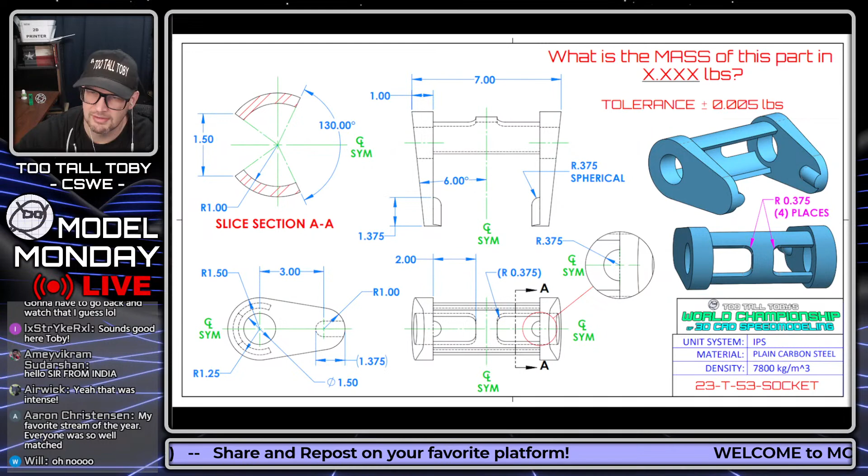We've got this one here, the counter shaft. This is number 56. If you want to see me model this, I'd be happy to do it. Number 53, the socket. If you'd like to see me model this, number 53, let me know.

Number 59, the duct. I'm definitely going to do this one as well. Our runners did not finish this one, so I'm going to model this one up for all of you today using Onshape. And number 41, the support base. Number 58, the housing. And Airwick says, I did that one, number 55. There's definitely an interesting bit in that one. Okay, cool. Yeah, we're going to definitely do that one in sheet metal.

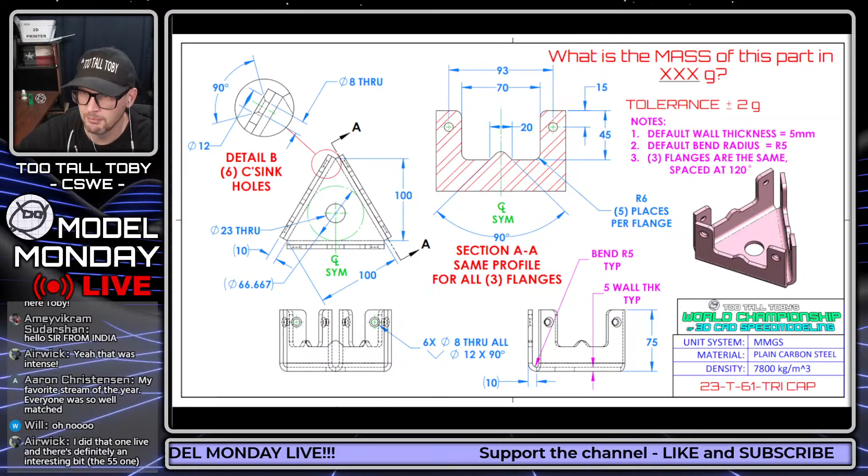Yep, in Onshape. Number 58, the housing. Very, very fun model. Definitely some tricky elements to this one. And finally, number 61, the tri-cap. So lots of models here for you to look at. You can roll the video back if you want to pick out one that you want me to model. Otherwise, I'll just model the duct and the sheet metal part, and then we'll see if we have time for any other ones. So I just wanted to show you them before we got started.

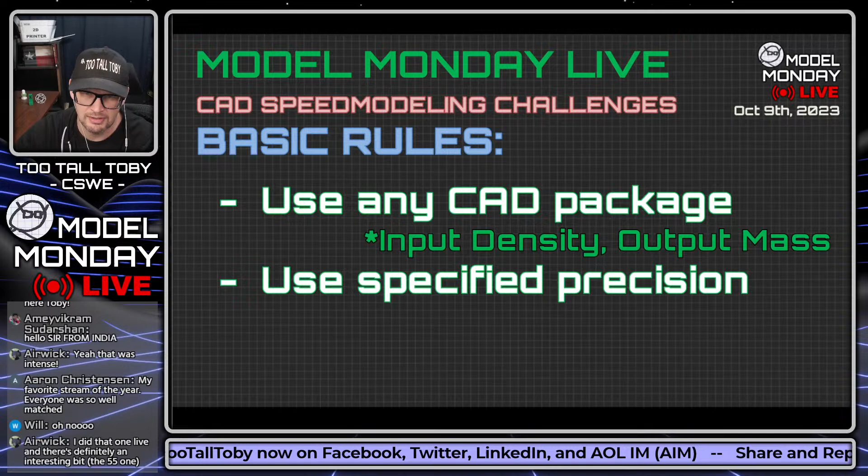All right, so here we go. Here's your first speed modeling challenge. I'm going to show you a 2D print, and I'm going to challenge you to turn that into a 3D model. And your goal is to calculate the mass of this model and to enter that mass in the YouTube chat. Now, the basic rules of this challenge are that you can use any CAD package as long as you can input a density and output a mass. Use the specified precision that is on the print, and the first correct answer in the chat will be declared the winner.

Here's the units that we use. We use either IPS, inch, pounds, and seconds, or MMGS, millimeters, grams, seconds, and we ask for the weight in either pounds, grams, or occasionally kilograms. The materials that we use are coming right from the SOLIDWORKS library, so if you're using a different CAD system, your library might be a little different. Just make sure that you've got the materials mapped with the density that is shown on screen at the moment.

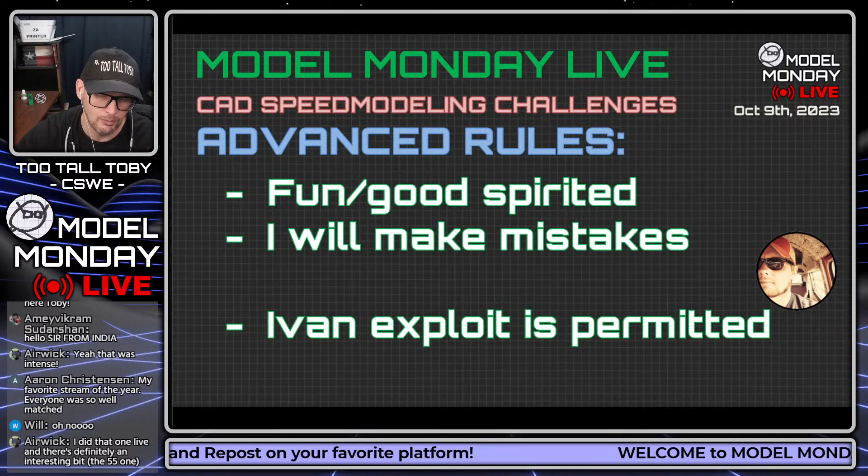And the advanced rules are that this is meant to be fun and good-spirited. I will make mistakes from time to time, and the Ivan exploit is permitted in this challenge. So if you can find a spot to use it, do it. But if you don't want to, don't do it. Just do it the right way. No offense, Ivan. All right, here we go.

This first CAD challenge on this beautiful Model Monday, October 9th. Let me just adjust my screen a little here. Make sure you guys can see the whole thing. Stand by. Okay. This first CAD challenge begins in 3, 2, 1, go. Okay, we're going a little old school here. We're going back to 2021, some of the old files before the purge.

All right. I hope that was enough time for everybody to grab a screen capture of that challenge, to move it over into your second monitor, and to begin creating that using your 3D CAD of choice. I'm going to talk a little bit about the tournament, and then we are going to get into some Onshape CAD modeling, because these days Onshape is my 3D CAD of choice.

So let's talk a little bit about the tournament here. Guys, we're in the Elite 8. I made a little promo video this morning letting everybody know. Here we are, the Elite 8, the final 8 people. Basically, we're at the bracket championship for each of these brackets. So here in the black bracket, we started way back on July 15th. And now here we are, October 21st.

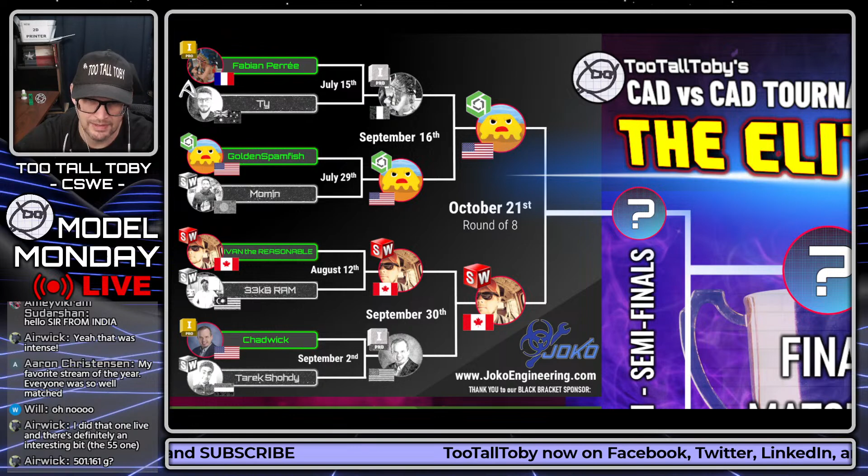We got the Golden Spamfish using Onshape. We got Ivan the Reasonable using SolidWorks. And whoever wins that match is going to essentially be the champion of their bracket. They're going to move through their bracket. They're going to be declared the champion of the black bracket. So very cool that this is where we are in the tournament. The Elite 8 kind of rounding out. We're down to just 8 people.

It's crazy. Juiced from the blue bracket, October 21st, is going to go up against Victor K. Victor K is a very speedy SolidWorks user. Juiced is a very speedy ANSYS SpaceClaim user. And we're going to find out. You know, a lot of people are saying, oh yeah, ANSYS SpaceClaim is fast, but only when the geometry isn't complicated. Well, in the round of 16, the geometry got more complicated. In the Elite 8, the geometry is going to get even more complicated. So we're going to find out if that's true or if Juiced is able to just cruise right through, no problem with that more complicated geometry.

She has been absolutely crushing it. She got through the round of 32. She got through the round of 16. She is now in the Elite 8. And congratulations to Jihan moving through that. And of course, also to Imants.

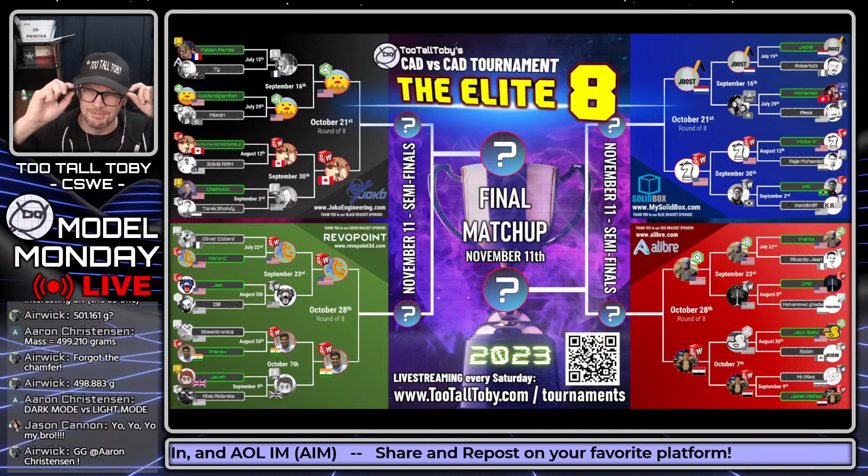Hey guys, we got Jason Cannon in the chat. What is up, my brother? Welcome, thanks for joining us today, great to see you in here. As some of you know from the tournaments, Jason is, I guess you'd call him, my CAD mentor. He's really helped me figure out my way in the world of CAD and 3D CAD. So, truly an old friend and somebody I'm very glad to see in the live stream today. What is up, Jason? Thanks for joining us, bro.

All right guys, so let's move on now. Oh, John is here as well. John, welcome, thanks for joining us. Got a nice sheet metal challenge for you there for that first challenge.

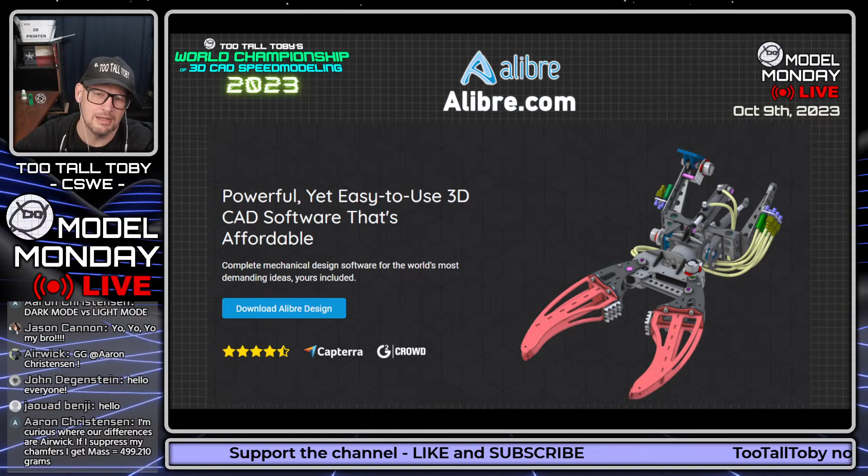Alibre, really coming through, powerful yet easy to use 3D CAD that's affordable. Alibre said, we want to give CAD to everybody in this tournament. So all of our runners, everybody who participated in the tournament, is going to get a seat of Alibre Atom 3D, a lifetime license, up to third place. Second place is going to get an Alibre Design Pro lifetime license, and first place, the champion, is going to get a seat of Alibre Design Expert. So totally epic seeing our sponsors coming through and seeing Alibre saying, we just want to give CAD to everybody, we want everybody to have 3D CAD.

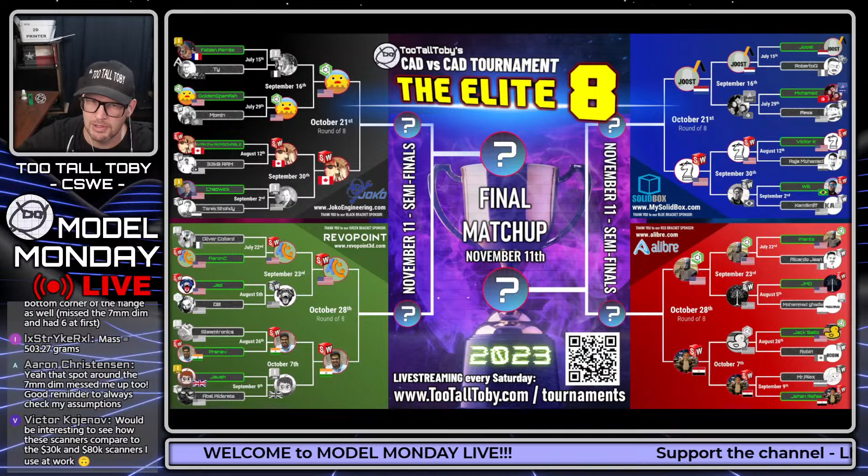All right guys, that's pretty much it for the summary of the tournament. Congratulations to everybody who made it into the Elite 8. Great to see Victor K in here, great to see Aaron C in here from the Elite 8, also great to see Will in here. I know there was somebody else from the tournament who had been in it a little earlier, sorry if I'm missing you, I'm just going back to look who it was. Thought I saw somebody sneak in who was in the tournament earlier too. But great job to everybody who's been in the tournament this year, congratulations.

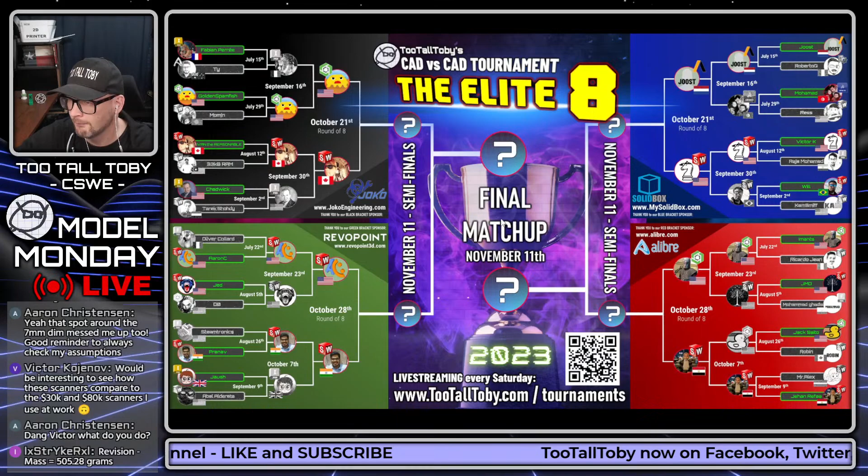All right guys, let's take a look here. I think what I'm going to do is start out with this one, since our runners really had a lot of trouble with it. So I'm going to get into Onshape and model this thing up.

I've been having a lot of fun in Onshape, you can see some of the stuff I've been modeling. Everything I build is in the public space, so you can always search for it in the world of Onshape. Here you can see I did a little bit of migration from SolidWorks to Onshape, a little sneak peek of an upcoming tech tip I've put together for the Onshape video series.

This is a migration of an assembly from SolidWorks into Onshape, fully functional. It had lots and lots of mates in SolidWorks, but I was able to do it with just 6 mates here in Onshape — 3 groups, 2 Revolutes, and a gear mate, and boom, we're done.

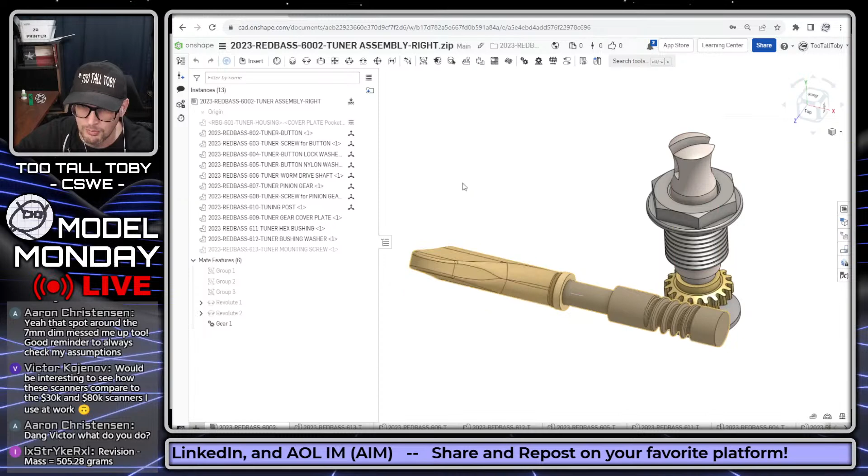The cool thing about Onshape is you can always right click on a mate and choose animate, then let this thing rip and watch how it would function in the real world, which I think is so cool. It's kind of a pain to do that in SolidWorks with the animator, if you've worked with the animator timeline you run into some challenges sometimes, it takes a little getting used to. You can definitely get there, but I was very happy to see how easy it was to bring these files from SolidWorks into Onshape and get a functional assembly pretty quickly.

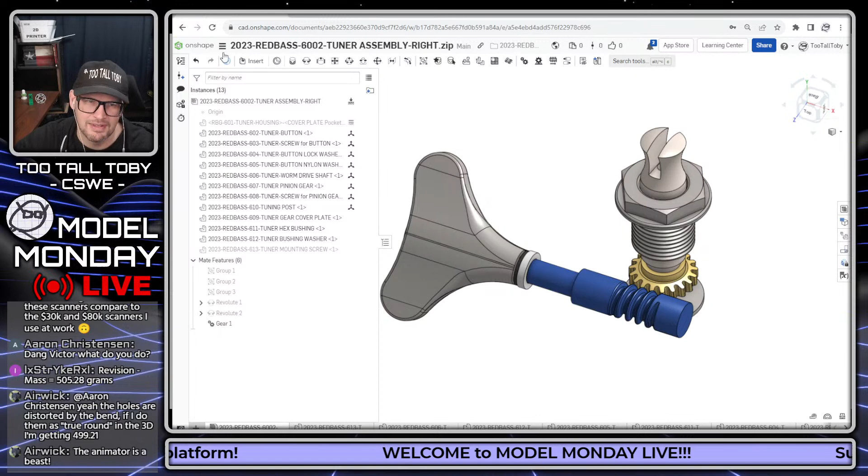The animator is a beast. Yes indeed. All right, let's keep going here.

We're gonna take on this model here. We're gonna try and do this in the next 5 minutes. We're gonna give ourselves a 5-minute. I wish I had the 5-minute clock here, I'd put it on for everybody to watch.

But the model here, when you look at a model, anytime you're doing the TooTallToby challenges, usually the first thing you do is grab a screen capture, and then look at the print and ask yourself if the designer or the drafts person left you any information that'll help you. And in the case of this model, there is definitely some information that'll help us.

The model is symmetric. That's definitely going to help us just in terms of locating one of the planes. So one of the planes is going to run right up through the center here.

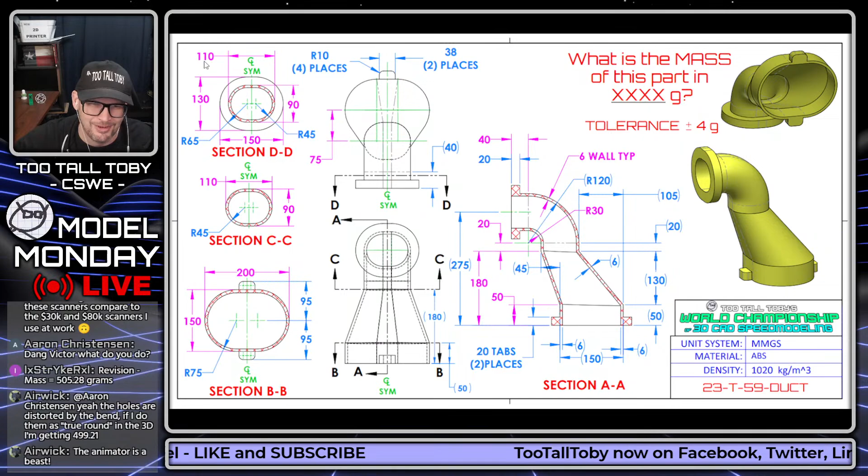I know Jason is in the chat today. Jason, if you see me doing anything that you think you would do different, feel free to let everybody know. I can still learn, I'm sure, from you. So just feel free to let anybody know.

I think one of the first things I'd notice is that we've got these lines of symmetry. That's going to help us locate one of our planes. Our central plane is going to run right up through here, right up through the middle, and that's going to really help us. The next thing I'd notice from the drafts person is that we've got this 6mm wall thickness kind of all over the place.

So 6 millimeters, 6 millimeters, 6 millimeters. There's even a note on here somewhere. Here it is, 6 millimeters wall thickness typical. Now, when we have that note, what that says to me as a mechanical 3D CAD user is shell.

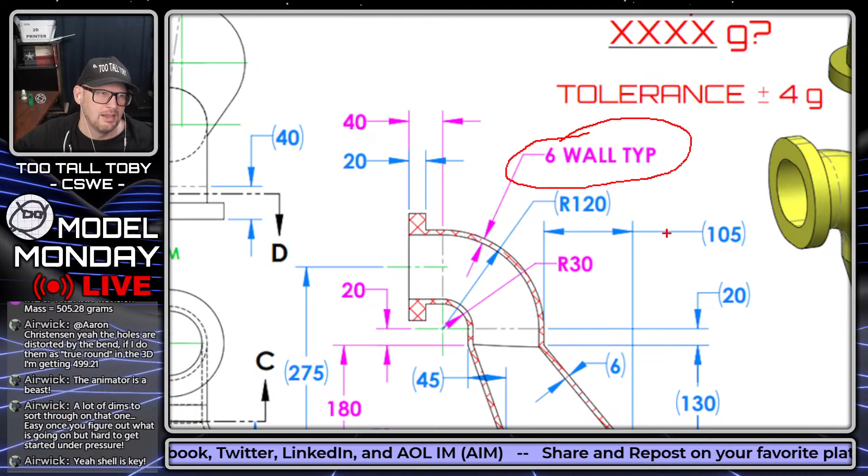Yeah, Airwick is saying it in the chat. Shell is key. This is something that both of our runners really struggled with when they were trying to build this part. I think the biggest reason why is because they missed that indication that there's going to be a shell in this model, and they tried to do it as a hollow part right from the start. You really want to do any of your solid features, like extrusions or lofts, first, and then go back in and add the shell.

So if you go back and watch that match between Jihan Rafa and Jack Sato, you can see them really struggling because they started out with a hollow or thin feature, and then tried to use that hollow thin feature to loft and to sweep, and it got really, really messy.

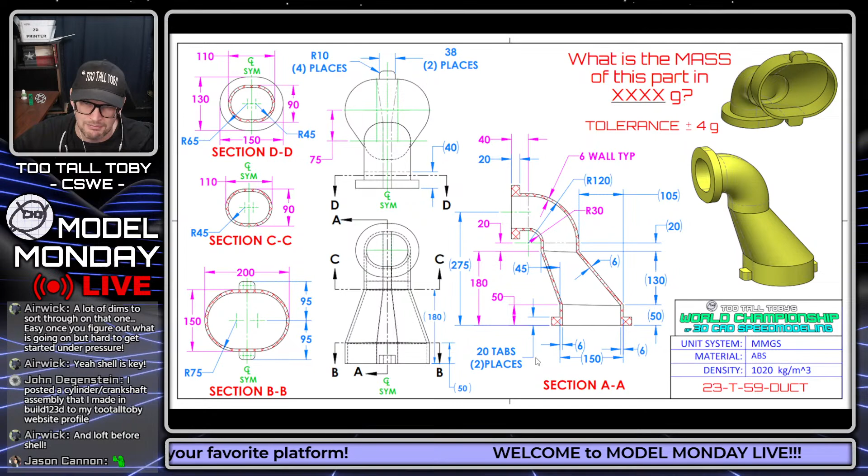So I think what I'd do with this model is start out with this shape here, this 200 by 150. And once I do this 200 by 150, I would extrude that up to a height of 50 millimeters. Then I would create a new plane here at 180 millimeters off the top. And once I create that new plane off 180 millimeters, I'm going to create this shape here, this section CC.

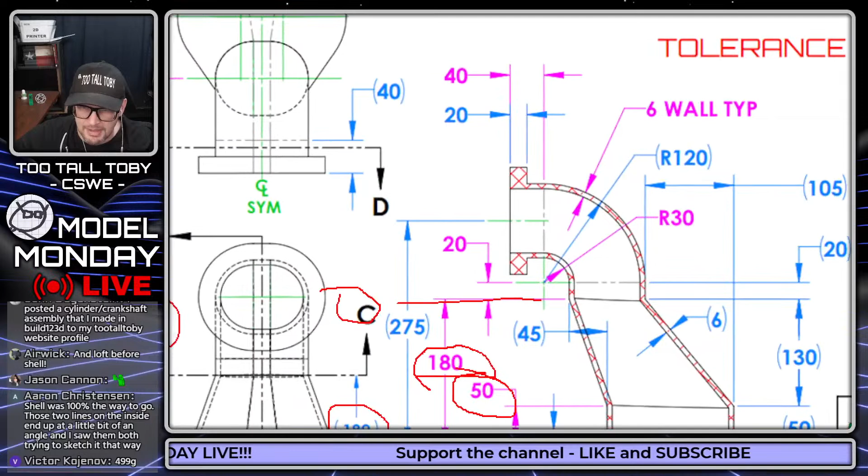So we can see here, we're getting this indication of section CC also being 180 millimeters up. For this one, I'm going to create this with a 110 by 90 millimeter slot feature essentially. Then I'm going to take that shape and extrude it up to a height of 20 millimeters. Once I've got that shape extruded up to 20 millimeters, I can just take that profile, rotate it around 90 degrees with a 30 millimeter radius, and then finish off by extruding that to 40 millimeters.

And once I have that shape in place, then I will shell it, but not before. If you try to shell this thing out before, you're just going to end up struggling. So that's my game plan.

I know I burned off 3 of my 5 minutes just kind of coming up with the game plan. So let's see if I can't model the rest of this in just about 2 minutes. I might be pushing it a little bit, but we'll see. We'll see what kind of power Onshape holds for us.

23-T-59-duct. Whoops, nope, duct. Sorry, guys. That's probably how our runners felt as they were trying to create this geometry.

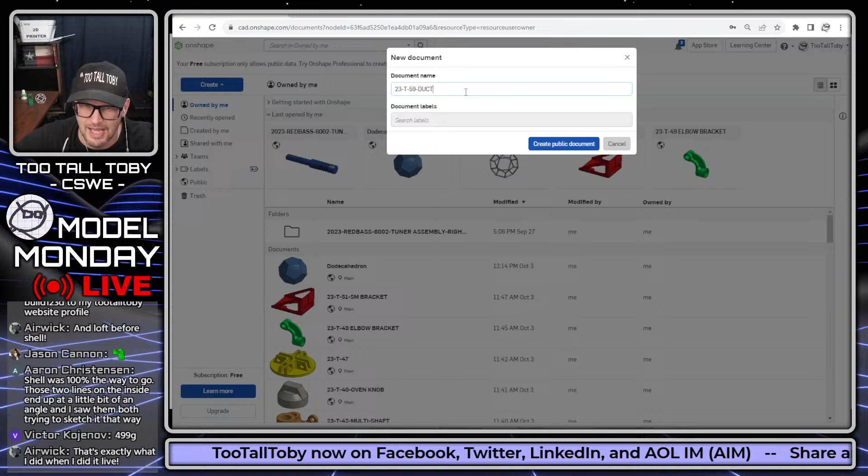And then we're going to say that this is going to be a public document, so if you want to search for it, you can. Top plane, begin to sketch, orient my view.

And I'm going to start out here by creating a sketch of a line. And that line is going to have a distance of, let's see here, it's going to be 200 minus 75 minus 75, so 50. So 50 millimeters for the length of that line. And then I'm going to just take that line and take the origin, and I'm going to assign a midpoint relationship between them. And then I'm going to select that line and jump into the slot command.

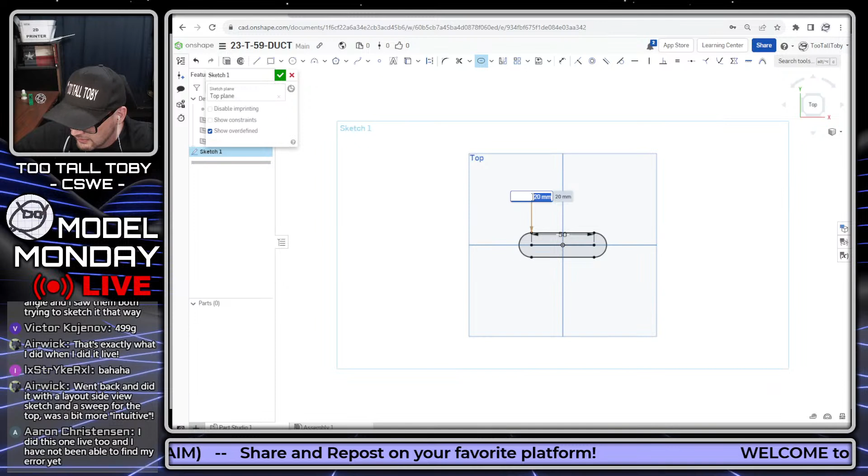And I'm going to create a slot here, which has a dimension across at 90. And the 50 there is already solved. If I wanted to just take a quick sanity check dimension, I can just dimension here to these arcs, and I can see that that's coming out at 140. Nope, that's not right. Oh, I was looking at the wrong section view there. So this is going to be not 90, 150. There we go. Okay, so there's my sanity check, 200.

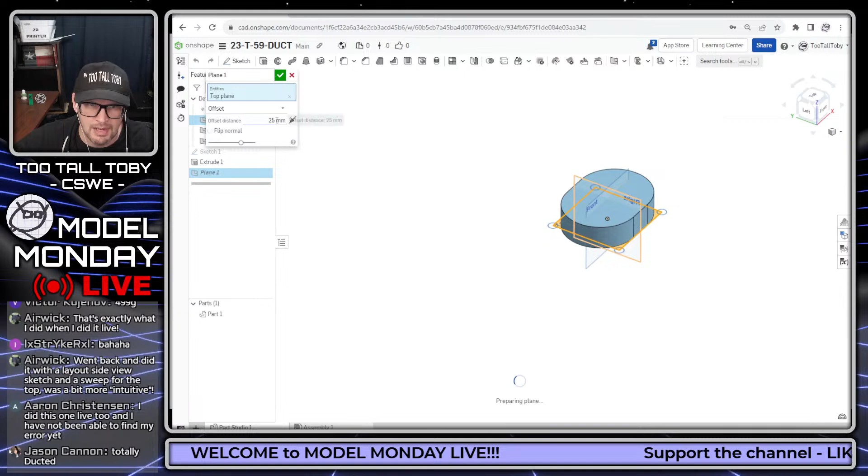That is correct. And now I'm going to take that geometry and do an extrude, and that's going to go up to a height of 50 millimeters for that first part of my game plan. Now I'm going to take the top plane, and I'm going to jump into the plane command, and I'm going to say I want to offset that to a height of 180. And so there's my second plane there. And now I'm going to start a new sketch on that second plane.

And for this new sketch here, I'm going to create, once again, a line. This time the line is going to be kind of over here. And this time the line is going to be 110 minus 90. So it's going to be 20. So just doing some quick math here in my head from the 2D print. Let's drop a point on here so we can easily make a midpoint. I know there's other ways we could align that to the origin, but I'm just going to take this point here and give it a midpoint relationship.

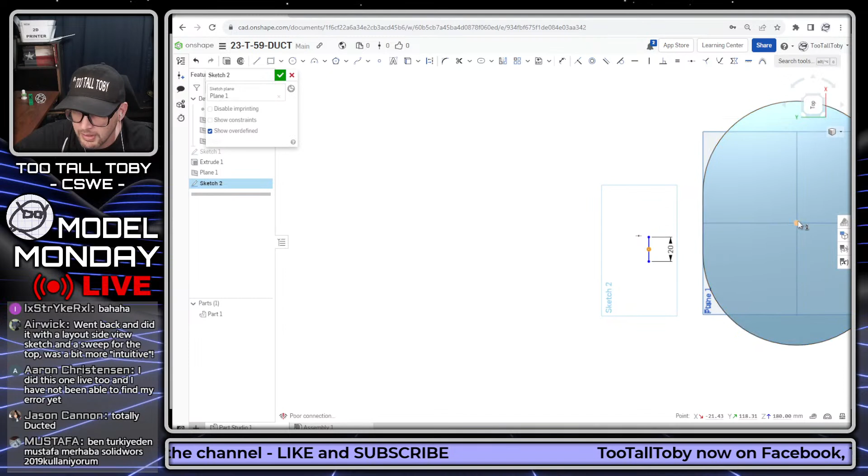And then that'll make it a little easier for me to take this point and the origin and make them horizontal. Whoops, make them vertical, let's say. So a little Control-Z for undo. Good to know that Control-Z works here. So we're going to make those vertical. And then there is a dimension on the print here to help me understand what the center-to-center distance is. And that dimension is 75 millimeters. So I can assign this dimension 75 millimeters so that I know that those line up at 75 millimeters.

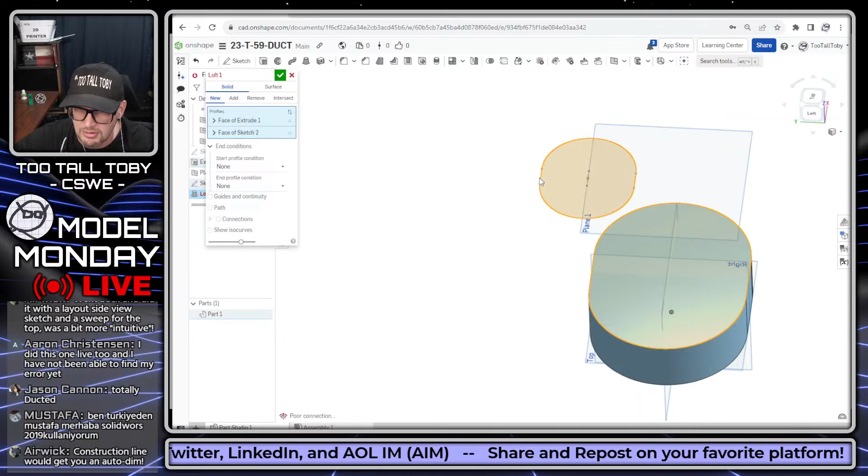And then we're going to take this line here and go into our slot command once again. And this time our slot is going to have a distance of 90. There we go. And now let's just make this line construction just to make sure we don't run into any hiccups. I can jump out of that sketch, jump into a loft, and say I want to loft from this geometry to this geometry, and boom, there we go. That's exactly what we wanted. Now in Onshape, I don't have to create a new sketch. I can just take this face here and extrude that up to a height of 20 millimeters.

And then I could probably do some kind of a transform here, but I think what I'm going to do instead is just do a use here. So I'm going to take this, do a right mouse button, select tangent connected edges, and do a use. And then I'm going to draw an extra line out here. And I'll make that line a construction line. So I click on the line here and do a Q. And then we're going to say that that's going to be at a distance of 30 millimeters.

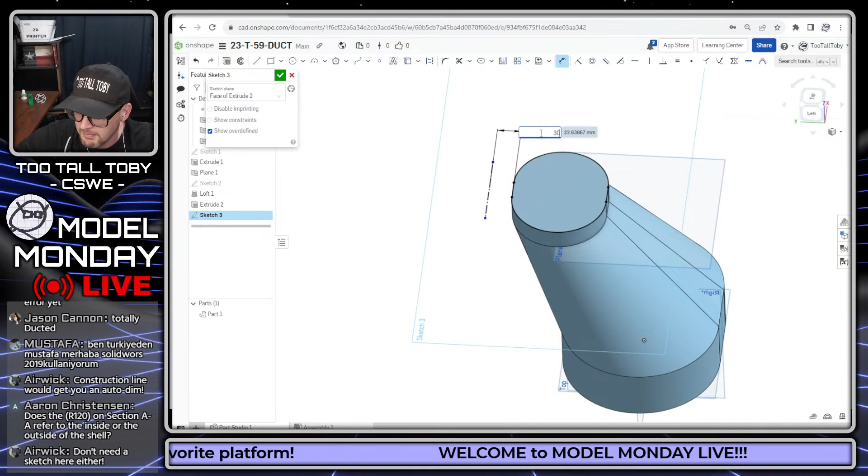Don't need a sketch. Airwick says don't need a sketch here either. Yeah, how would you get the location of the rotation? I'm not saying you can't. I'm just saying could use a mate connector for the center. Okay, nice. I like it. That's good to know. So I'm going to use this sketch here for the revolve.

I'm going to use this for my revolve axis, and I'm going to say that that is going to go to an angle of 90 degrees. And you can see here that that's a different color. That's Onshape indicating that you made a new body instead of adding to the existing geometry. So I'm going to add to the existing geometry. Now it is showing up as red, which is kind of interesting. I wouldn't have expected that. Huh. Interesting.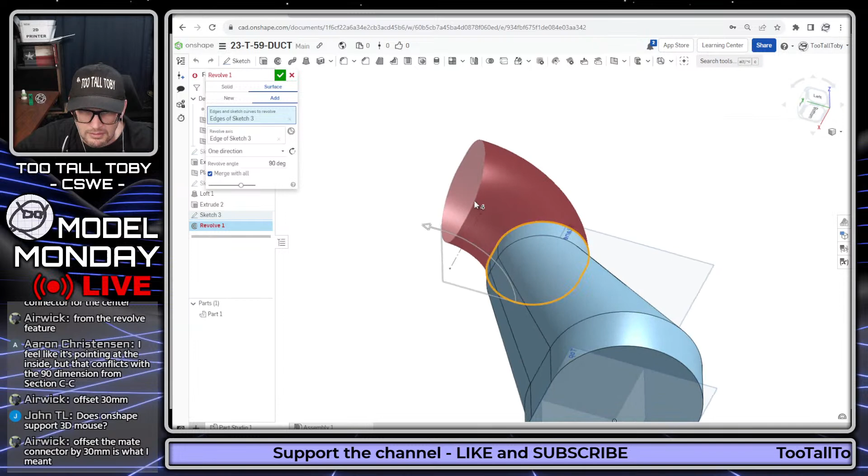So, okay, let's do it as a new body. It says you're in a surface. Okay. Ah, thank you. What would I do without you, Airwick?

All right, so we're going to do a revolve here. We got the edge of the sketch. We're going to do this as an add, and we're going to say it's going to merge to here. There we go. It was on the wrong tab there in the feature. Thank you very much. And now we're going to take this face and jump right into an extrude from that face. That's going to go out to 40. And we're going to say that's going to be the end of that feature.

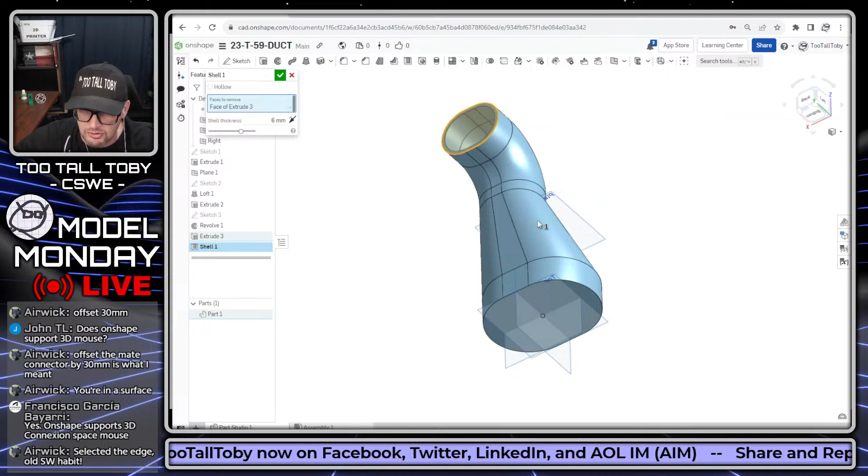And now we can jump into a shell. We can use that 6mm shell option to shell this thing out all the way through. Yes, yes, yes, that looks good. And now we can take this face here and we can begin a new sketch on this face. And then we're going to do this entire face here. We're going to offset its geometry. So offset that, and that's going to get offset to...

See, this one has a dimension on it all the way across. It's got this dimension of 150 by 130. So it looks like that's going to be an offset of 20mm. So I can just click out here in the background if the direction is correct, and then I can type in the distance 20, and then I can do an extrude, and that's not going to be the entire sketch, but instead it's just going to be this region extruded to a depth of 20mm, and I'm going to reverse

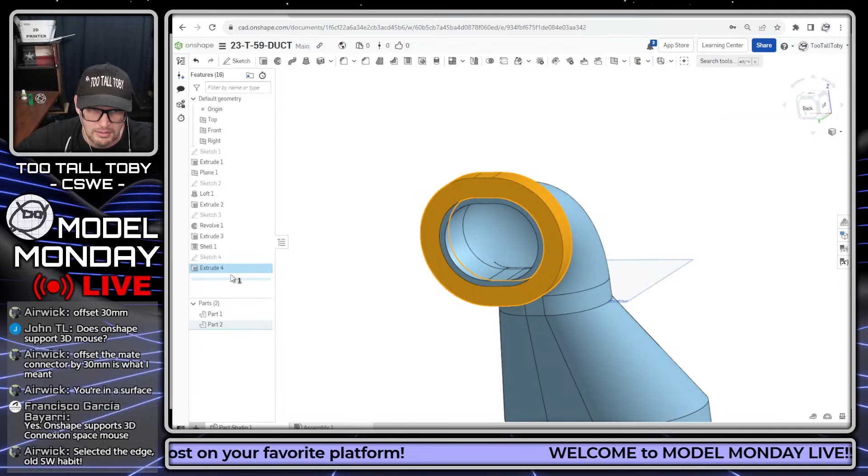the direction. I'm just kind of doing some quick math there in my head to get the depths of some of these features instead of using the math function. I could have used the math function as well. And then finally, I'm going to come down here to the bottom of the model. I'm going to create a sketch of a rectangle like so.

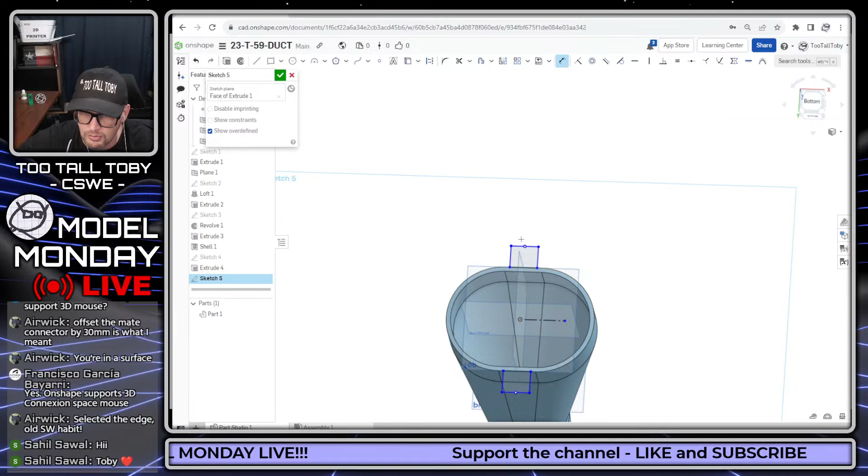And once again, we're going to line up these points. So this point and this point are going to be vertical. Say vertical. Okay, good. And then I could do mirror. So we make this equal, and then we could mirror this across, or we could do the mirror at the feature level. You can do it either way. It's probably actually better to do it at the feature level, but in this case, I don't think it really matters that much.

And then if we look at that top view, we can see that that is supposed to be 38mm, and the distance to the center is 95. So distance to here is 95. And then we're going to extrude that. That's going to go up to a height of, I think it's 20. Yep, 20. And then we'll finish off with a fillet. And that fillet is going to be at 10mm. So fillet there, fillet there, fillet there, and fillet there.

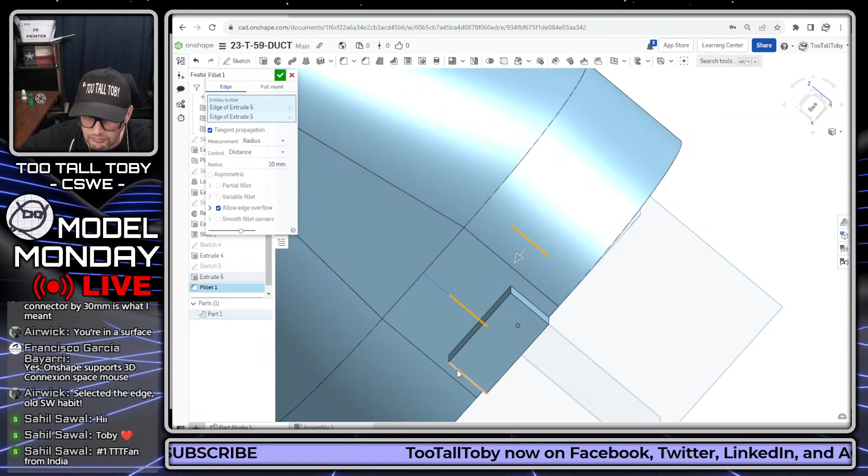All right. And now we're ready to assign a material. This is going to come from the TooTallToby material library. So if you guys ever want to do this yourself, you can actually access that library in the public space in Onshape. If you have a free account, you can access all that. And I'm coming up with a mass of 1068. Let's take a look here and see if we got it correct. Oh yeah, 1068 is the correct answer. Good job, Toby. You're excellent at modeling these parts. You should enter the tournament next year. So that's how we do it.

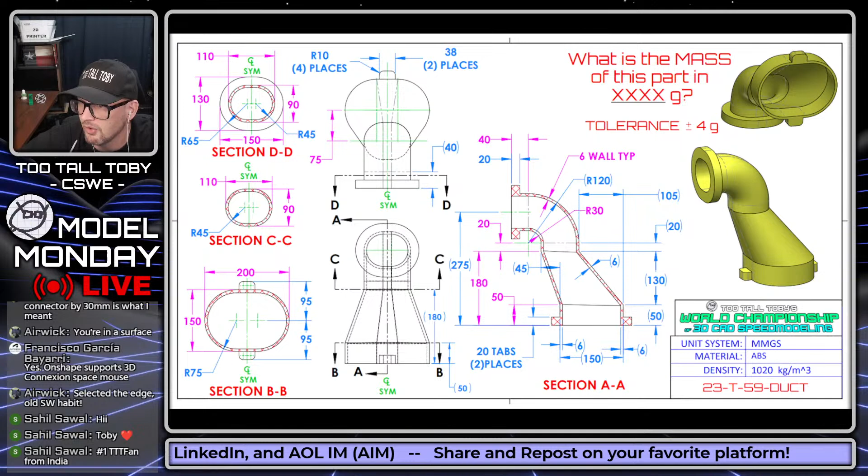What's up, Sahil? Welcome, welcome. Thanks for joining us. Onshape supports 3D Connexion Space Mouse. Yep. Got to get that. I do have a 3D Connexion Space Navigator. I just need to get it up and running.

All right. Just reading through some messages here. Looks like everything is good. All these messages are good. Joe Ho says 7 minutes, 20 seconds. Not bad. Thank you, Joe Ho. Appreciate it. All right, let's take a look here and see who got the answer correct to our first challenge.

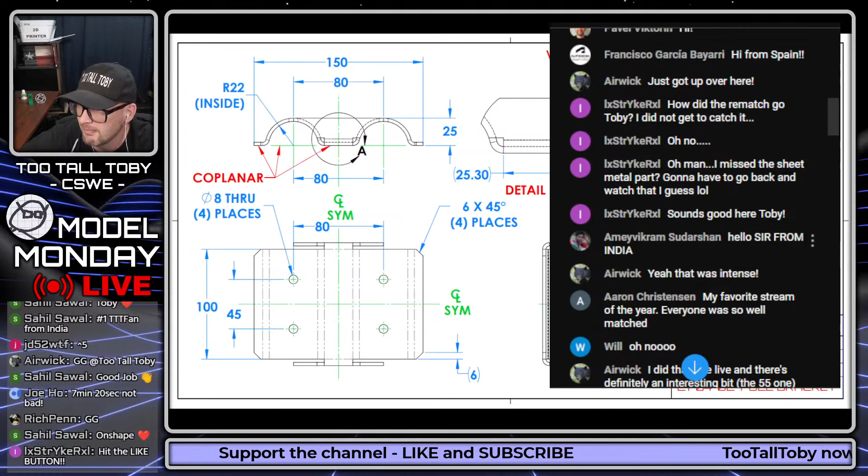I almost showed it, guys. If you were quick, or if you pause it, you can find the answer. All right, so let's see here. I saw the answers coming in the very beginning. I saw Aaron C and Airwick were battling it out. So let's take a look here and see what we got from these gladiators, really. So Airwick coming in 501. Aaron Christensen 499.2. Airwick says forgot the chamfer, 498.89. So we'll call that 499.

Both of them coming in with 499. Aaron C 499. Will 490. Very nice, very nice. Striker coming in 503. Striker revising 505. Airwick 499 coming in again. The animator is a beast. Yep, shell is 100% the way to go. Yeah, the two inside lines will really mess you up. Yeah, they're on like a weird, funky angle. Yeah, it's almost an optical illusion because both those dimensions are at the same height.

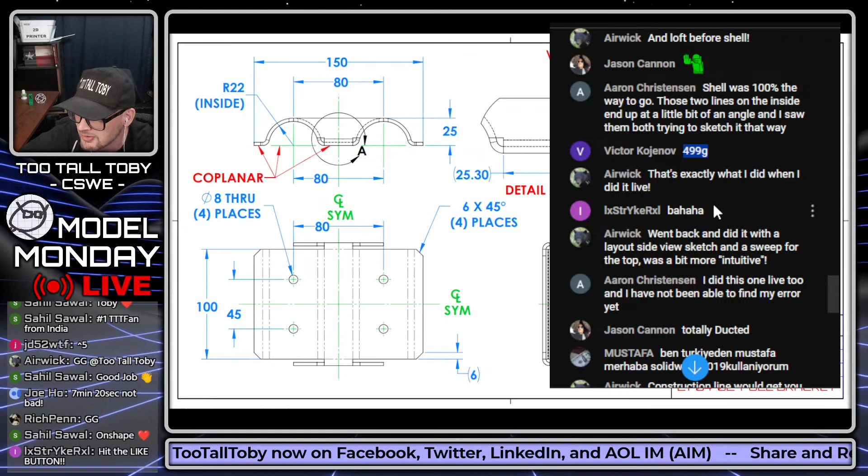Just kind of reading through the chat here as I'm going through. Exactly what I did when I did it live. Went back and did it with a layout sketch. It's a bit more intuitive. Yep, that's cool. All right, Mustafa is here. Welcome, welcome. Thanks for joining us. Okay.

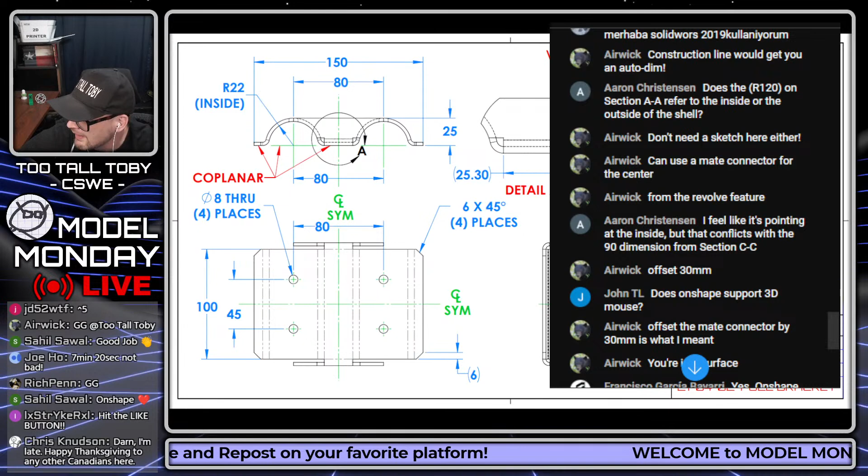So 120 on section A, refer to the inside or the outside of the shell? It refers to the... 120. I think it's 110. 110 or 130. Either way, it refers to the outside. Oh, section AA. 120. Radius 120. Yeah, that one is a little bit gnarly. That does refer to the outside as well. The only way you can really figure that out is if you add 30 and 90 and then cross-reference the other section view. But yeah, that refers to the outside. I feel like it's pointing to the inside, but that conflicts with the 90 dimension. Yeah, that was a tough dimension for me to draw because I wanted to show that it was coming from the same radius. Yeah, you guys got it.

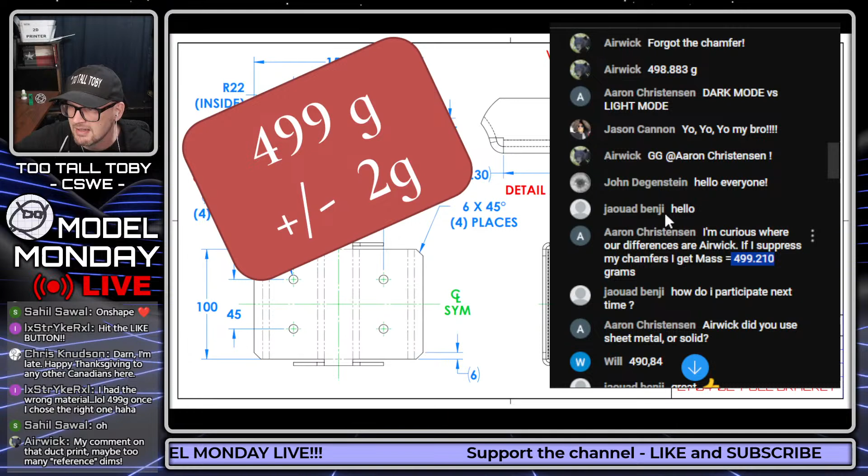Striker: I had the wrong material, 499 once I chose the right one. What's the correct answer, guys? Correct answer is 499 grams, plus or minus 2 grams. So congratulations to Aaron C, continuing his domination of Model Monday Live. Well done, well done. Aaron C gets the point today. GG to Aaron C. Oh, wait. It is Aaron C, right? It was Aaron C and Airwick going back and forth. Airwick 501, Aaron C 499. Yeah. Congratulations, Aaron C. Well done. Everybody give a GG in the chat. GG to Aaron C.

And we're going to get into this next challenge. 21st and 28 are going to be an epic battle. Yes, indeed. My comment on the duct print: maybe too many reference dimensions. Yeah, I agree. There's a lot going on in that print. I completely agree. Too many dimensions. We're getting into the elite 8 here. Sweet 16, elite 8. We gotta make sure that we give these guys good challenges, but there's other ways to give them challenges.

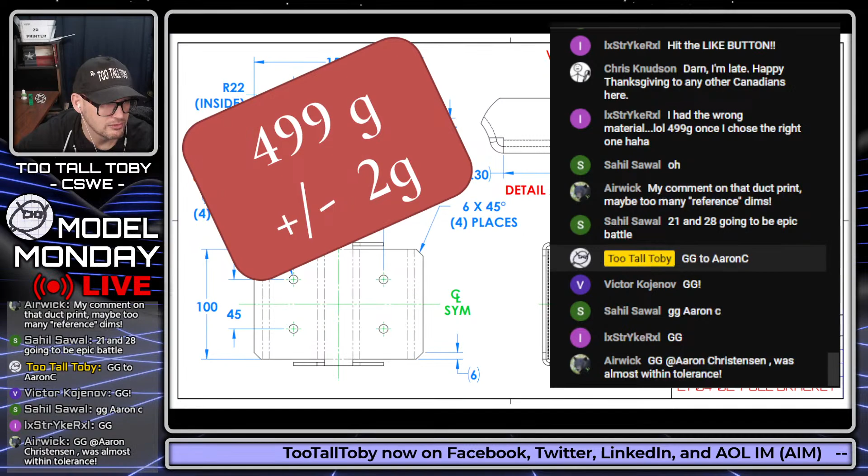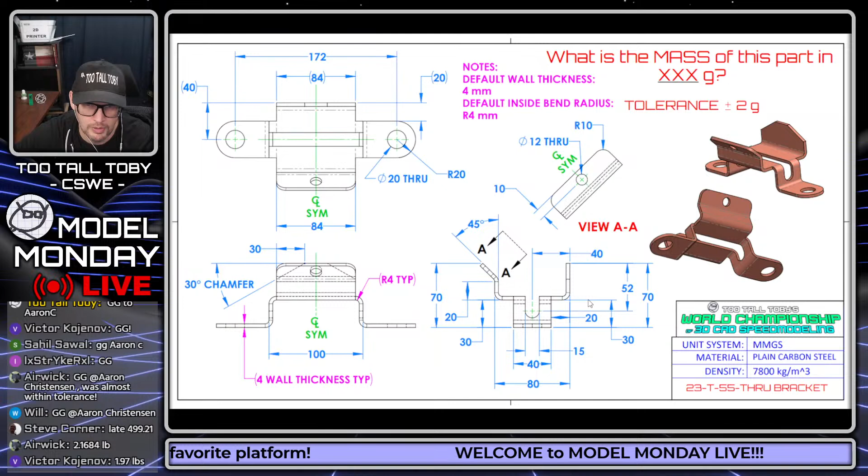All right, guys, I want to do this part here in Onshape. This is a sheet metal part. I think I'm going to make a proper tutorial for this one as well. I think I posted a practice model using this part, if my memory is working correctly. So I think there is a practice model of this part, but it's slightly different. Some of the dimensions change. So I'll probably make the video tutorial on that. But today we can take a look at this using Onshape.

And so just like as I did in the previous example, and just like as always, what you want to do with a model like this is you always want to start out with kind of a game plan. So again, we look to see if the model is symmetric. And the reason that's important is because that's going to help us define where the origin should be. So the origin should definitely have a location along this plane here.

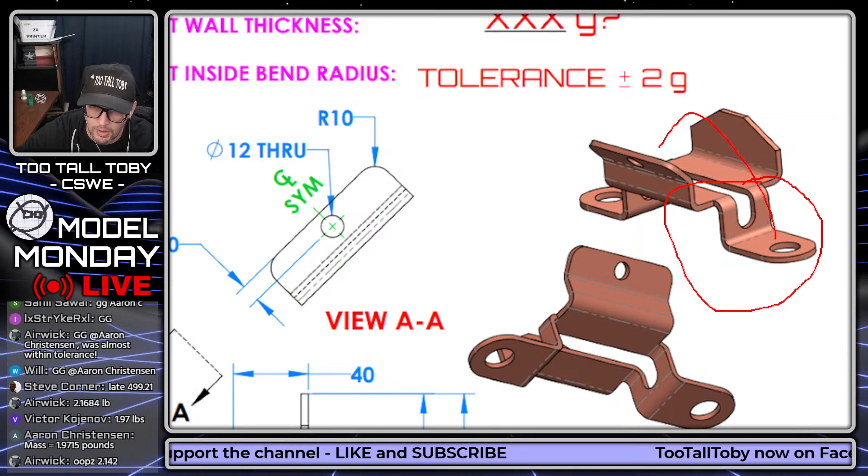And we should model whatever we can on one half of the model and then just mirror everything, save ourselves that extra effort if it looks like there's going to be an extra effort. I think that there is in this case. I think there is kind of an extra effort that goes in constructing this leg here. So maybe just modeling half of that, just creating that leg once and mirroring it across will save us some time. The next thing we need to decide is what is going to be our starting plane and what is going to be our starting profile.

And we can again use our engineering intuition to decide on an ideal location for the origin. So for example, there's this 40 millimeter dimension here that's coming from the back of the part and helping us locate this flange here. And then there's also an 80 millimeter dimension here coming from the back of the part and helping us locate this front section of the model over here. Well, if that's the case, then maybe it makes sense for us to create this geometry with the origin on this back wall as well.

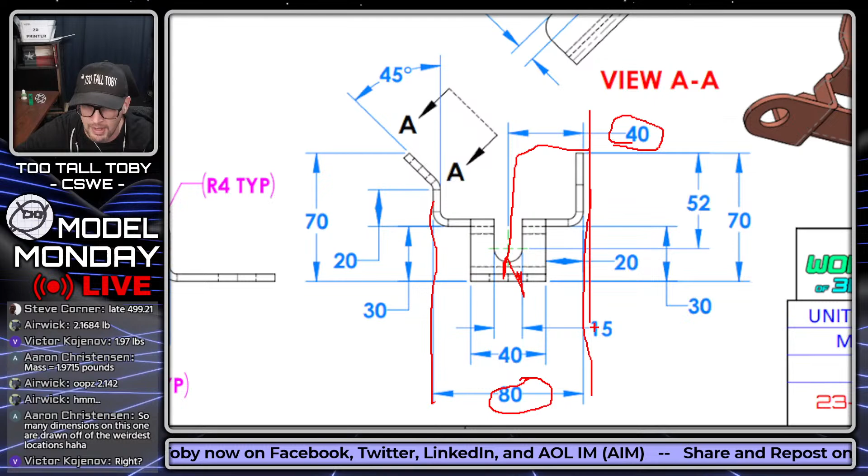So now we kind of know where the origin is going to be. It's going to be centered on the model. It's going to be against this back wall of the model over here. And maybe the lower part of the origin could just be right here, kind of located where this lower flange is. So now that we've got the basic idea of where we want the origin to be located, we can now get in here and start defining what our first profile is going to look like.

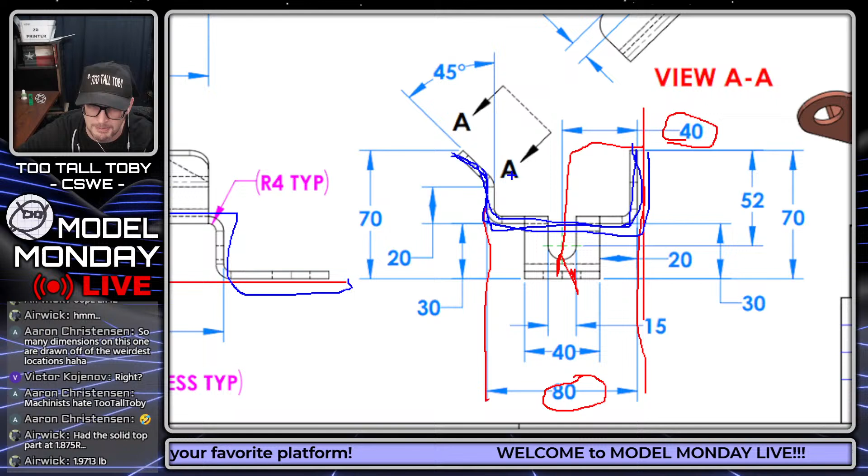And this is where things get kind of interesting, because you could make the argument that this should be your first profile, or you could make the argument that this over here should be your first profile. This shape kind of coming across here up over, really we'd only create half of that shape. I think those are both completely valid ways to start, but the reason I would opt to do this as my profile first is simply because I think it's going to be easier for me to make that as a sketched profile, especially this bend here, than it would be to create it with multiple bends, like an edge flange and then another edge flange. So for that reason, I'm going to create that as my first sketch in Onshape.

So here we go. My clock's showing 1:49. I want to make sure that I get you guys the correct answer. So let's try and do this in 5 minutes again. Not so much a tutorial, a little bit more of a speed run, but it could be looked at either way. So I'm going to close this model that we were just working on.

I'm going to begin a new document here. I'm going to give this thing a name. This is going to be called 23-T-55-THRU BRACKET. That way, if you ever want to look at this model, all you got to do is sign up for a free account on Onshape.

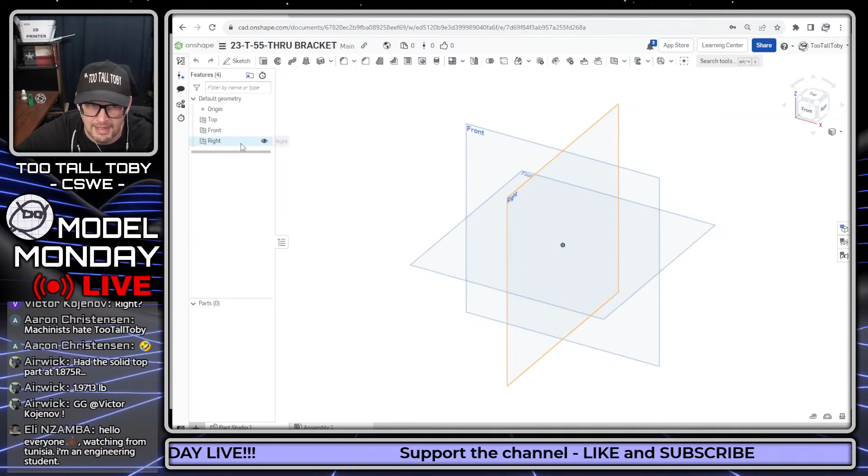Right plane, begin a sketch, orient my view. And once I get that view oriented, I'm going to create that kind of angle coming down, straight down section coming across here, and then a section coming up like so. And now I'm going to get in here and start adding some dimensions. So the dimension to the origin here, kind of like what we talked about in our game plan, is going to be that 40 millimeters that's going right to the center of that slot. We'll see if that'll help me out.

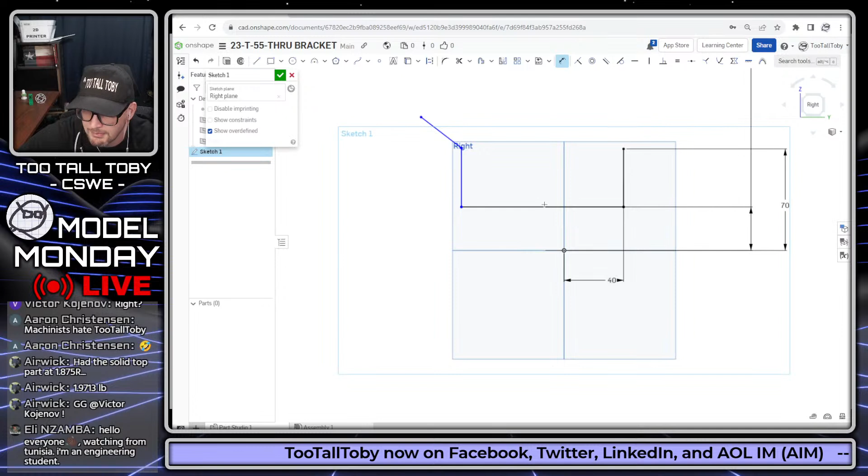The dimension from the origin to the lower part of the material, or the very bottom of the model to the lower part of the material, is 30 millimeters. The dimension to the upper part of the material here is 70 millimeters. The dimension from outside to outside across the outer parts of the material is 80 millimeters. This is at an angle of 45 degrees. And the section from the lower side of the material to the tangency point here is 20 millimeters.

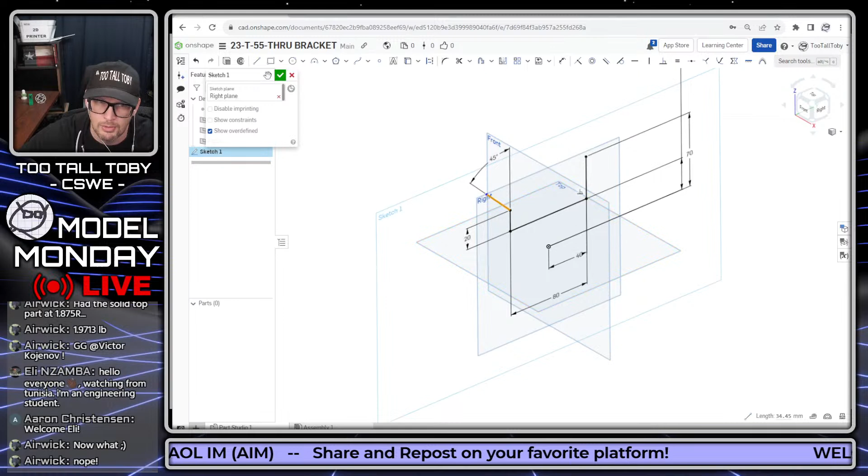Wow, this might actually not work out the way I'd hoped it would. I think I might actually have to make this as a separate flange, or it might just make more sense to make it as a separate flange. I think it's because of this 20 millimeter dimension here. I mean, we can look at it. Let's just do it first and measure it before we completely rule it out. But I think I might have to go back and do that a little bit different.

Yeah, now what? Yeah, exactly. Yep, I'm thinking that too, Airwick. Airwick knows the challenge that I'm setting myself up for.

So here we go, sheet metal model.

Let's do extrude, and let's take this geometry here. Let's kind of roll this thing around. One thing you always have to look out for when you're working with sheet metal is making sure the material is on the correct side. This is 4 millimeters and 4 millimeters for those two parameters there.

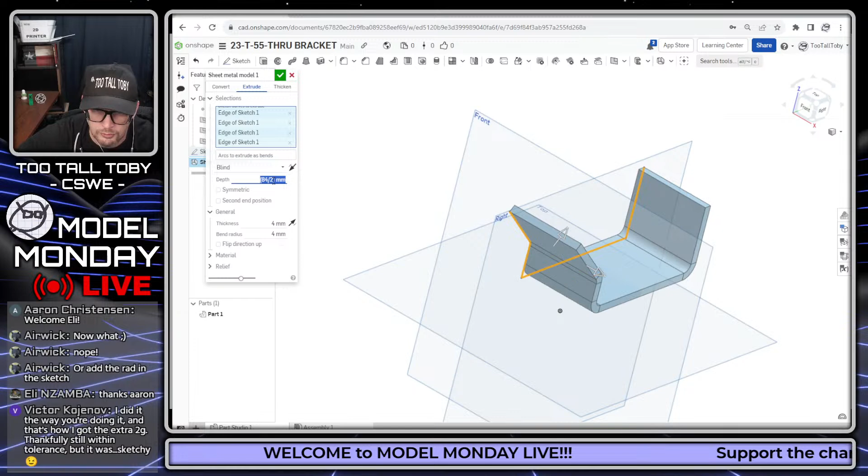Let's hit the depth to 84 divided by 2, because we're just doing half the model per our game plan. Now let's take a look at this measurement here. The measurement from here to this flat spot looks like it's got a parallel distance of 18.34315. So I could add that difference if I wanted to.

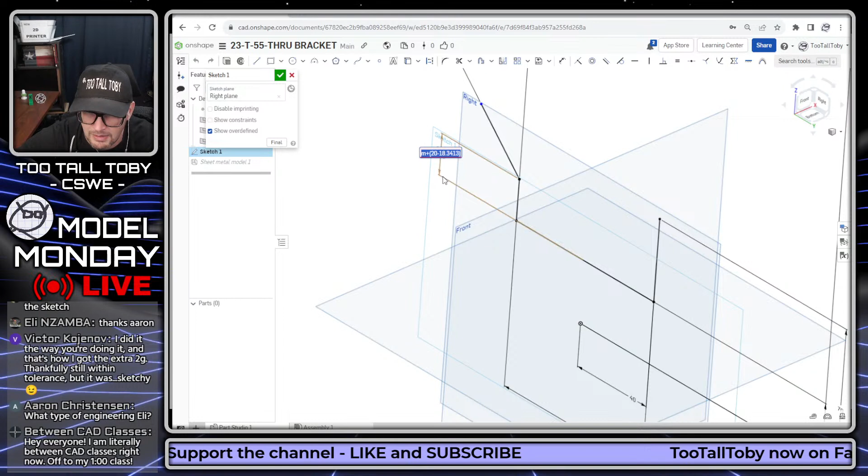I've definitely done this in speed modeling challenges. It's not exactly the most elegant solution, but I could do this here, this 20. I could say 20 plus parenthesis 20 minus 18.34 — I don't remember what the rest of it was, 13, something like that. I definitely could do that. That would be... is it gonna let me accept that? Maybe not, it's not gonna let me accept it.

Let's see here, can I take this and then add 20 to that? What did that end up being? 1.66. I'll just make it 21.66. Boom, we're speed modeling. This is not the way you'd want to do this in production for sure, you'd probably want to do it the other way. Okay, there we go, look, parallel distance, 20 millimeters. I'll take it.

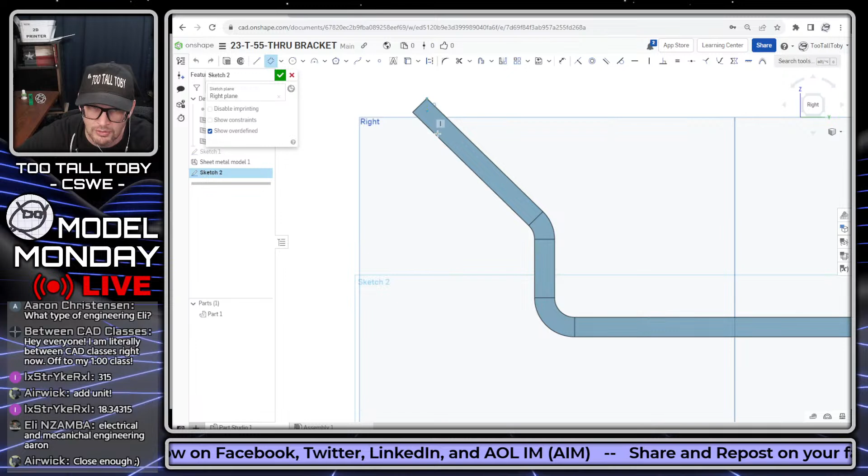So now what I need to do is get rid of this extra material here at the same height as this material over here. So I could just start a sketch there and create maybe like a parallel or an angled rectangle, so we could do something like this. Create an angled rectangle, and then we could take this point and make it coincident with this edge here.

There we go. And then I'm going to remove that material, so that's going to be a remove. Let's reverse the direction there and take that through. Okay, that looks good, as long as you don't look underneath. Close enough — yep, exactly, Airwick is saying close enough. I agree.

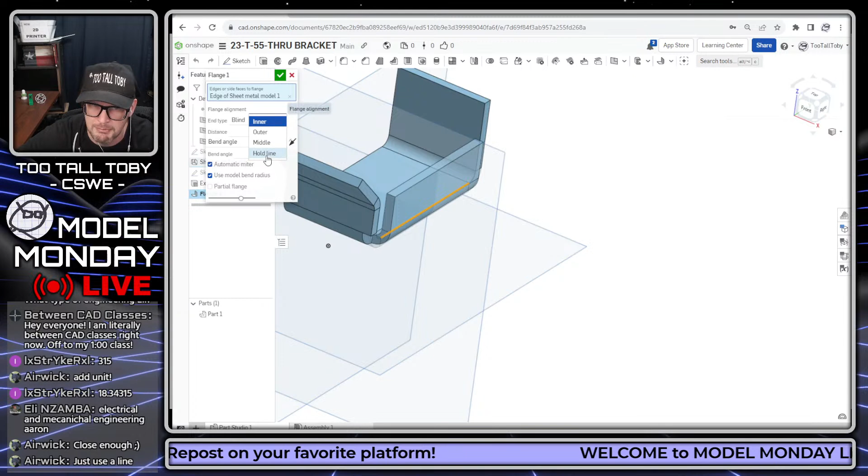All right, now we're going to create an edge flange here. So in Onshape, we do have the option to create a flange. And we're going to be using this option here for flange alignment for hold line, a little bit of a newer bit of functionality that was added to Onshape. And so we're going to use that hold line option.

And then for our end type, this really could just go up to entity, and it could go right up here to the top plane, just to kind of come up flush to the top plane. That certainly is an option.

And then for our flange option here, we could say this is going to be a partial flange, meaning it's not going to go the entire distance of the flange. And we can even do that on both sides, so we could say that we need this to come in a little bit from either side. For the end condition option, it could be the end condition from the edge here, or the print is saying make the end condition from this end face here.

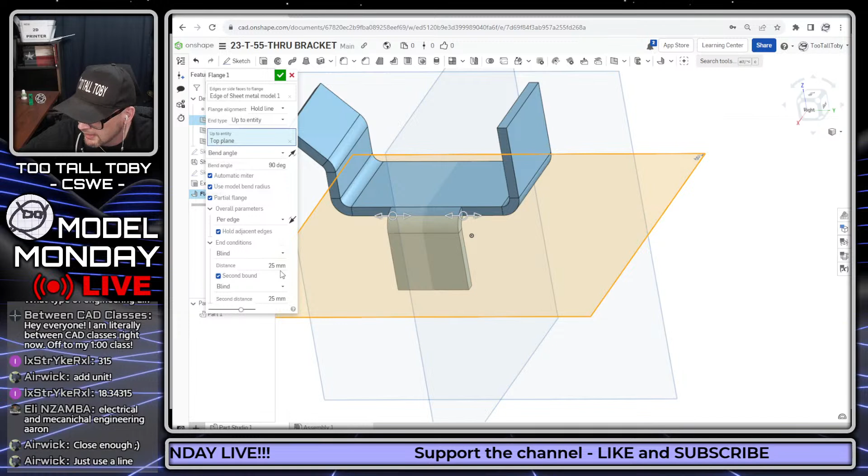I think I'm just going to do the math in my head. So it's 20 millimeters minus 4 minus 4, so it's 12 millimeters off of each of those. Off of each of those, so 12 millimeters off of that one and 12 millimeters off of that one. Is that right? 12, it doesn't look right compared to the print. I guess it's actually, maybe it is calculating it from the original hold.

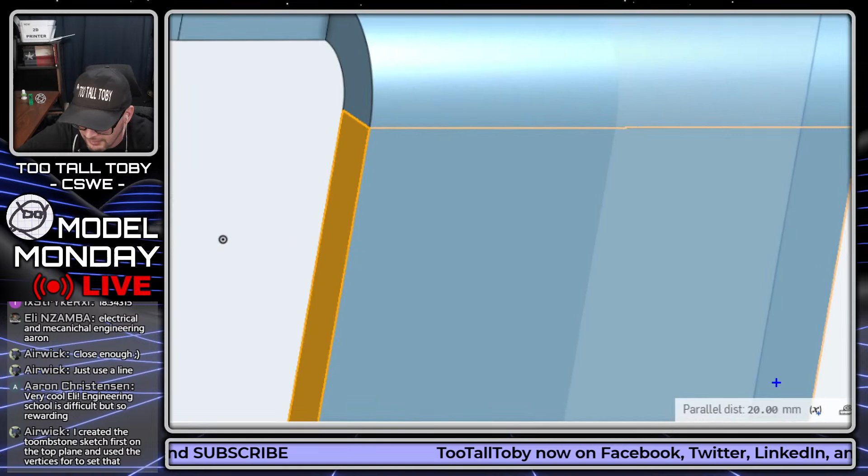That's kind of nice, I'll do a quick check there. One of the nice things about Onshape is that if you just pick two surfaces and you look down here, you can see the distance between those two surfaces — you don't have to go into a special mode or anything. SolidWorks has that too with the status bar, I talk about that a lot in my SolidWorks power moves. So okay, so that's what we needed, was 20 millimeters on each side.

And now we can continue on here, and we can take this edge down here and do another flange. Now this time when we go to do the flange, we're going to use the flange alignment here for outer. And if we look at this thing from the front, we can see what that's doing — it's aligning it flush to the outer material of the flange, aligned flush to where the original edge was.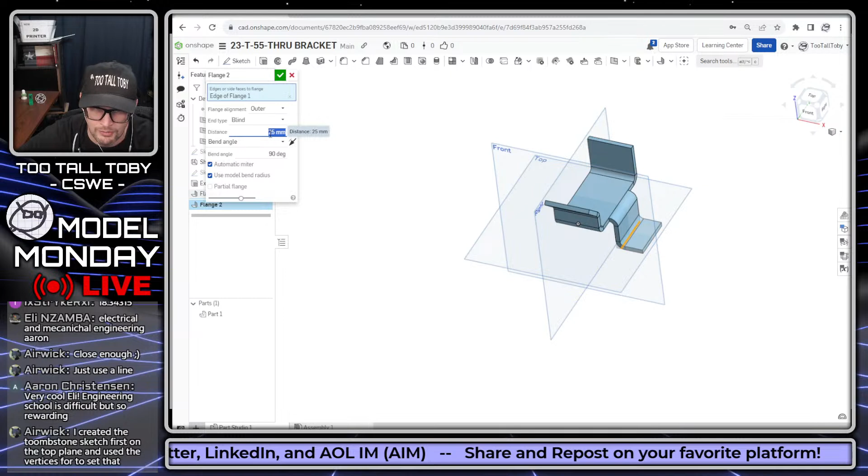So now we just need to take this out to the correct depth. This might be a spot where I'd overshoot it and come back. It's probably easier if I created some layout geometry to align this to, but instead I'll just lop off the extra and add it all in one step. So I'll make this go out to 70, maybe a bit more, 90. There we go.

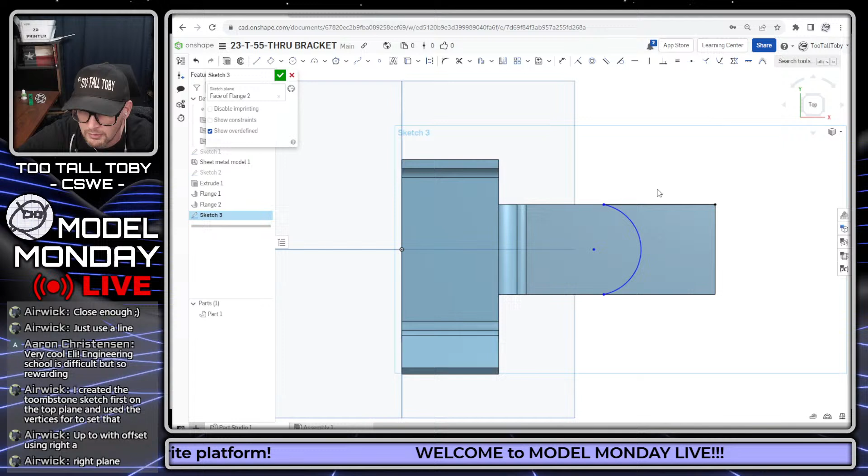And then I'm going to go to this surface, begin a sketch, orient my view, and create a line here that comes down to about here. Come back and, oh, I don't think I can reverse the tangency with the line in Onshape. I think I have to actually make it tangent using this technique. So we'll make that tangent, and then do another line on this side.

Make that tangent. And throw that hole in there, with a diameter of 20. Then all I need to do is add the distance dimension from here to here, and that is 172 divided by 2. Now I can do a remove, and that'll go through all, up to next.

Yeah, that works. And we've got our chamfer here. Almost done with this thing. This is 30 and 30, and that's on this edge.

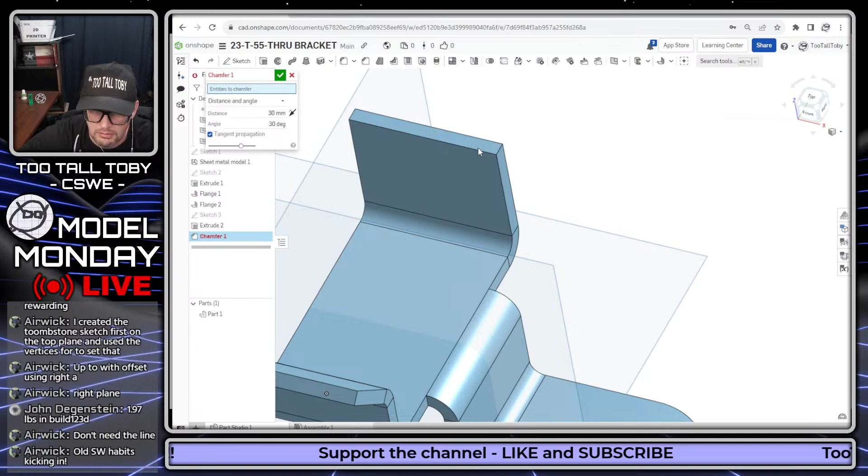Let's see, doesn't like that, huh? Maybe if I make this 60. Chamfer might not work - yeah, I've noticed some features don't seem to work in sheet metal yet in Onshape, so this might be one of them.

So we'll make this - whoops, wrong dimension there. Make this 30. Here we go, and then we'll make this 30. Okay, and we will once again remove up to next.

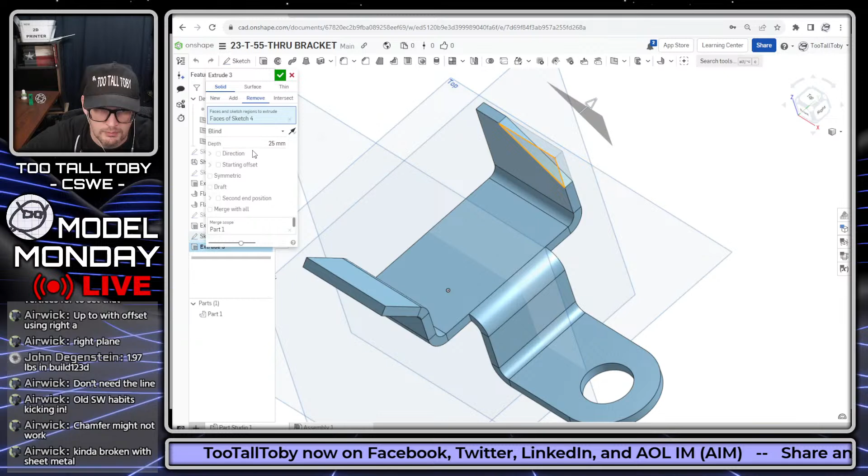And then on the other side, we've got a couple of fillets. So we'll do our fillet here, and that's going to be at 10 millimeters. And then we've got our 12 millimeter diameter hole, and that is going to be at an offset distance of...

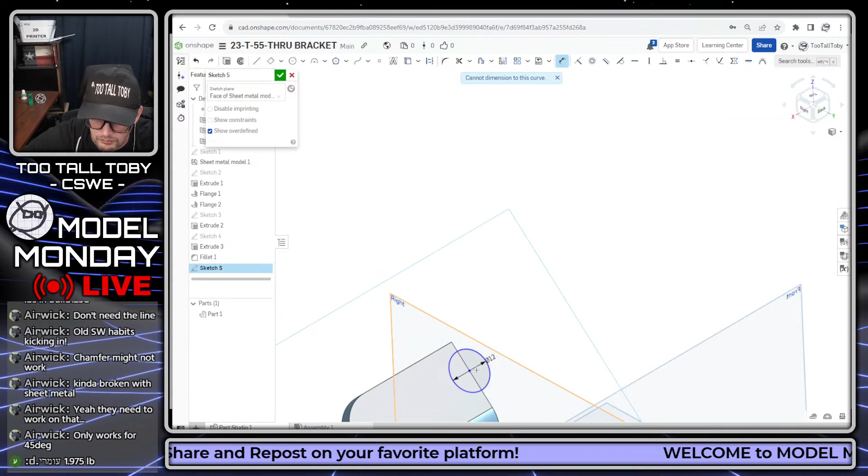Third time's the charm. Interesting, not seeing my dimension. Well, that's a little bit unusual. I don't know that I've seen that before. Maybe if I just go from the point, it's... yeah, okay, I don't have an explanation for that one.

We'll do a remove, we'll go up to next. And we will... next.

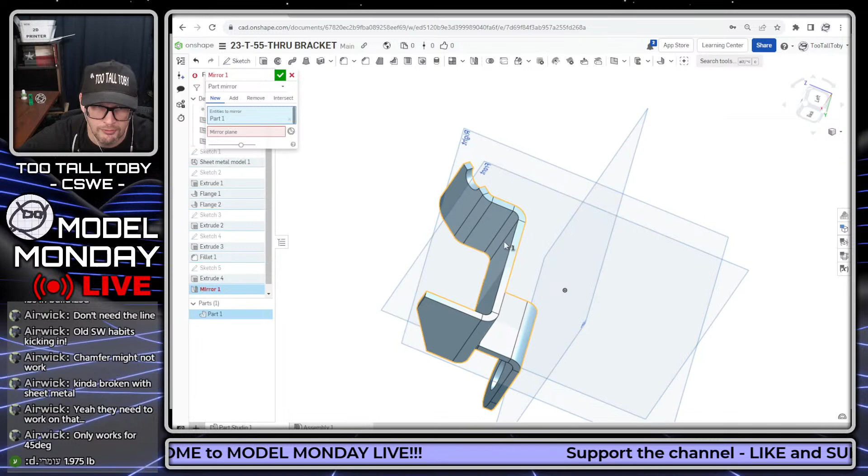And we will mirror, and we're going to be doing the full part here, mirroring the full part across this face. And we want to make sure we do this as an add, so we end up with one single sheet metal part. And that's how I would go about modeling that part.

This is once again going to be asking us to assign a material here. So our material is going to come from the TooTallToby library materials - it's going to be plain carbon steel. And that is going to come out to a mass of 568 grams.

Let's see if we got it correct. If we did, we're awesome. If we didn't, we'll have to fix it another time. 507 is what it's supposed to be - 568, 507... oh, I didn't do the slot through the middle. Still missing that cut down the middle, yeah, so get that cut down the middle.

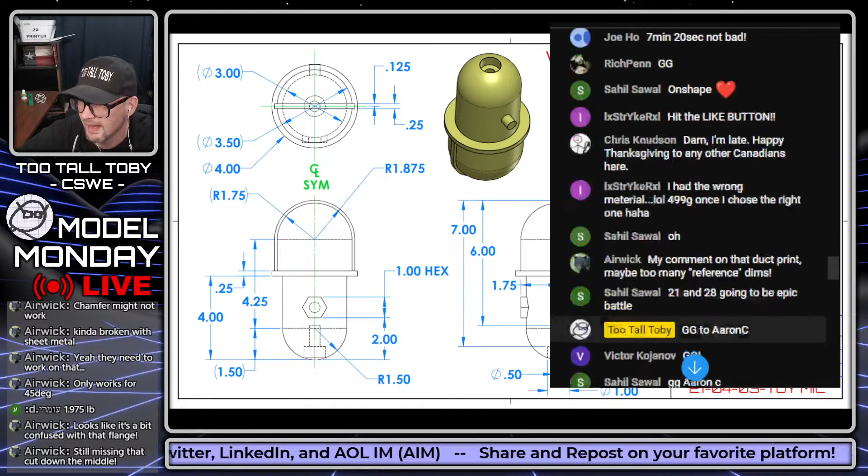And so let's see here who answered this one correctly. Let's go back up here. Looks like, oh good, we got a lot of good answers here today. This is awesome. So looks like our first answer came in from Airwick, 2.16 pounds.

Victor K, 1.97. Aaron C, 1.97. Airwick revising, 2.14. Airwick, 1.97, revising to 1.97. Let's see what else we got in here. Striker, 18.34315 - maybe a little bit off there. John coming in 1.97 using build123D. Awesome. Omri is here, 1.97. Very nice, very nice, very nice.

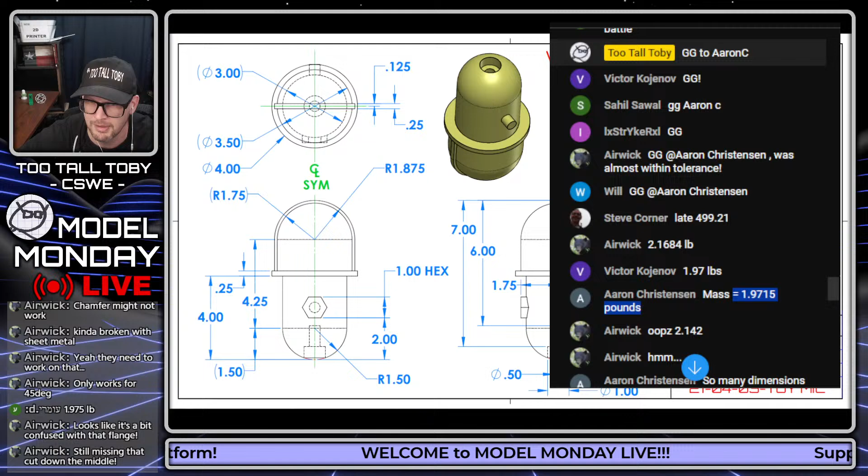So the first person who answered was Airwick, 2.16, and then Victor K 1.97, and then Aaron C 1.97. Correct answer is 1.97 pounds. Very nicely done - a lot of people in the chat got it correct today, so nice job to everybody who got it correct. But that's going to give that point to Victor K. So we got both Aaron C and Victor K in the tournament still, battling it out, and they both got a point today. So very nicely done. GG to Victor K, GG Victor, well done.

Giving me the dimension I was asking for. Okay, cool, thank you, appreciate it.

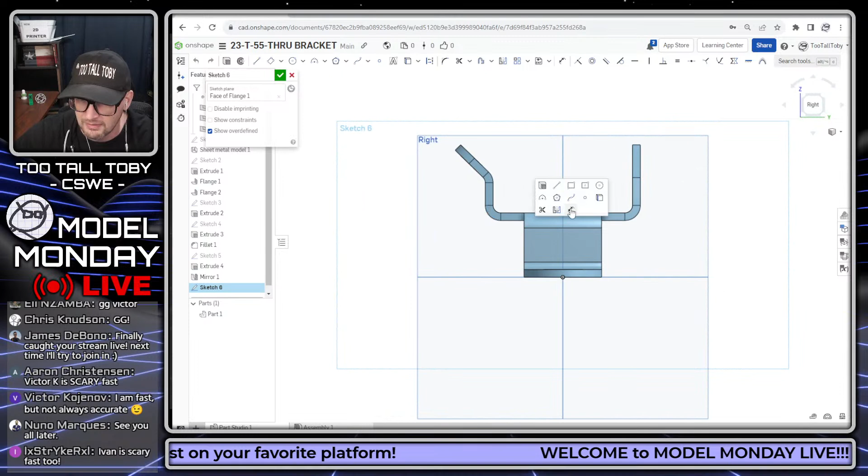And like I said, I'm going to go back in just because it's important to me to get this kind of stuff right. So I'm going to create this sketch of the slot here. In Onshape, we can come back, touch the endpoint, come around, and give ourselves a slot that way as well. You could do it with a center line and create a slot like what I did earlier - it's probably up to the individual to figure out which technique is better for them. It's like this is 15 across.

Look at that, I got almost perfect just by eyeballing it. And then it looks like we've got a dimension of 52 - actually it's to the center of that slot. I always forget that if you want the center, you pick the actual center point as opposed to the arc itself.

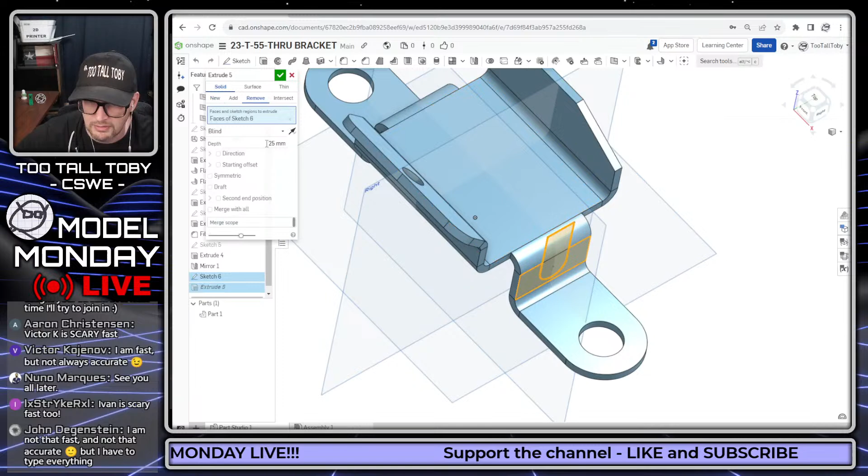Okay, let's do an extrude cut. This is going to be a remove through all. Rip that thing through the whole model there.

As always in Onshape, you can come over here to the sheet metal table and kind of see what this thing would look like in the flat. It's kind of cool that you can work in the flat and in the formed at the same time. So just another little benefit of Onshape.

Let's go here to our properties and boom, 507. We did it, we did it. Yes, thank you, we did it.